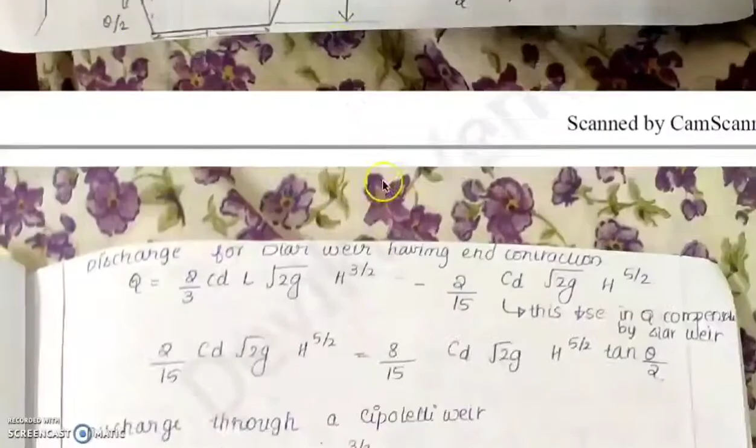So to find out what theta angle I should maintain to compensate the discharge, I can equate the reduction in discharge with the discharge occurring if I give a triangular notch. So this is equated with 8/15 Cd root of 2g H raised to 5/2 tan theta by 2, which you know is the equation for the triangular weir. I am equating these two to find out how much theta angle I should maintain so that it will give full discharge for that rectangular weir.

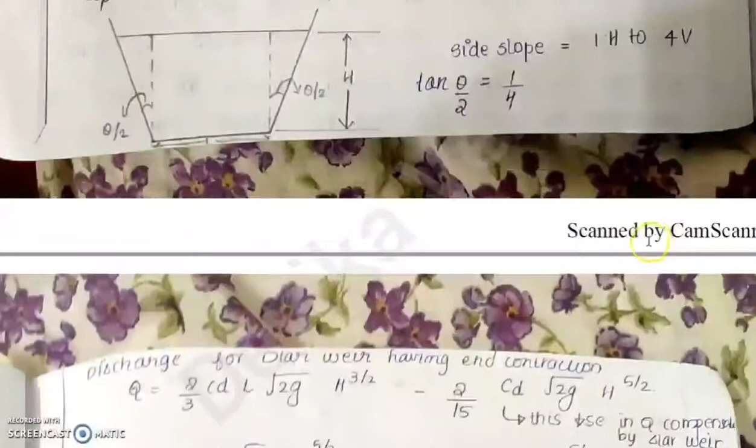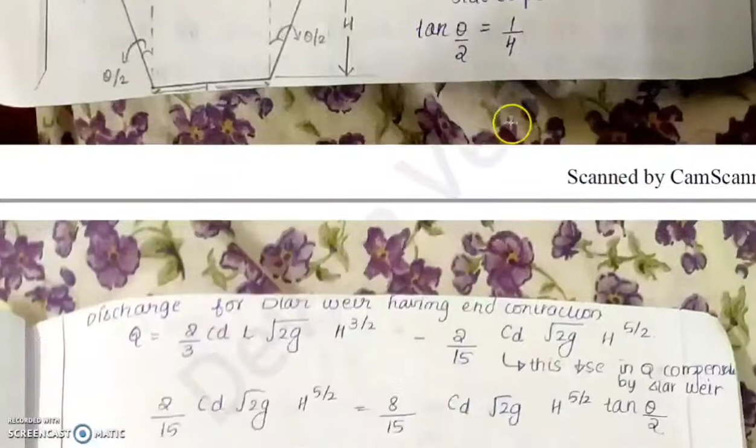So from this, the theta by 2 angle I get is 14 degrees 2 minutes, and the corresponding side slope is 1 horizontal to 4 vertical, that is 1/4. Tan theta by 2 should be maintained as 1/4. Theta by 2 angle is 14 degrees 2 minutes, and the corresponding value is 1 horizontal to 4 vertical.

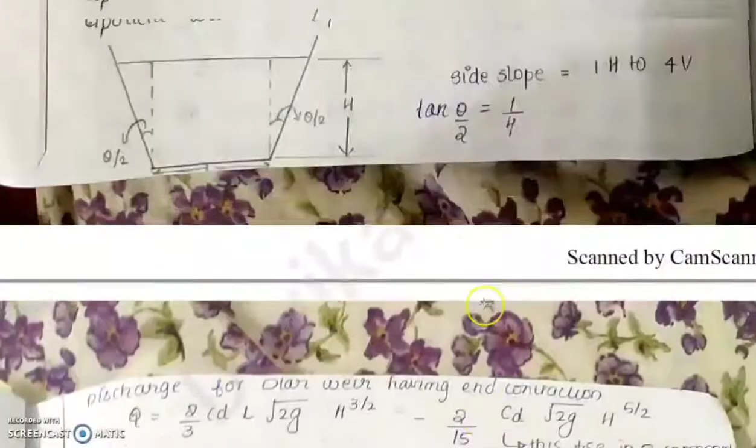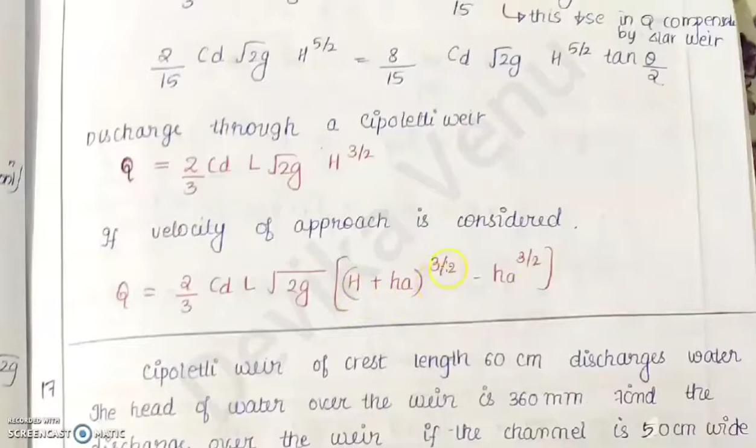So for the Cipolletti weir, you don't have to consider the end contraction term. Directly you can take the equation for the rectangular weir, that is 2/3 Cd L root of 2g H raised to 3/2. If there is a velocity of approach, you have to consider the head of velocity of approach, that is (H plus Ha) raised to 3/2 minus Ha raised to 3/2. I think the concept is clear, and we will see one example.

So, a Cipolletti weir of crest length 60 centimeters, L is given here, discharges water, and the head of water over the weir is 360 millimeters.

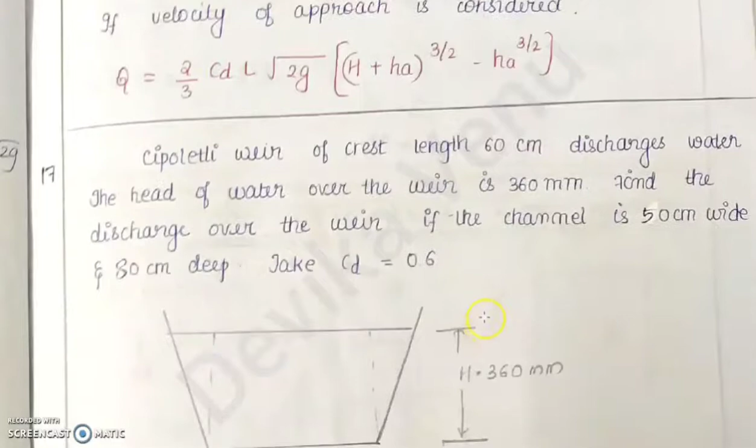Find the discharge over the weir if the channel is 50 centimeter wide and 80 centimeter deep. Take CD as 0.6. So it is given as for Cipolletti weir. You know the equation for Cipolletti weir, and we will see how it is done. Okay, so first I have drawn the figure of the given question.

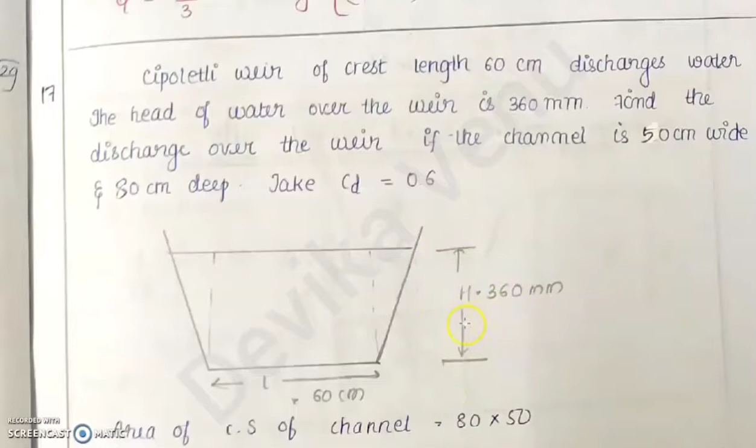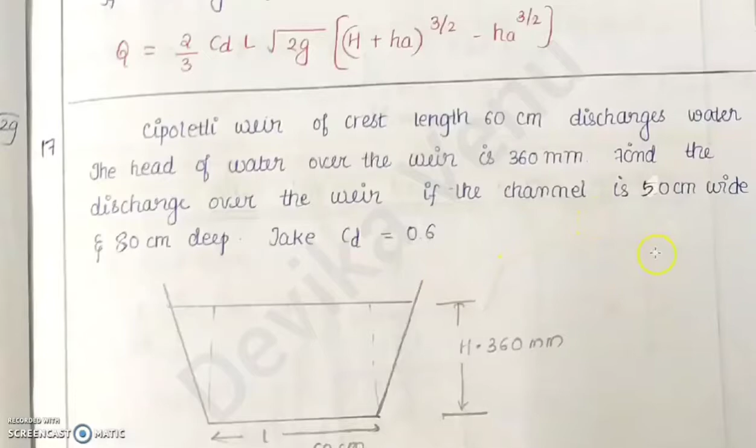So in the Cipolletti weir, crest length is 60 centimeters, height or depth of water in the weir is 360 mm or 0.36 meters. Okay, so I have marked that in the figure. Now area of cross section of the channel. See, the channel is of dimension 50 centimeter by 80 centimeter deep. So since that is a rectangular channel, I can find out the area of the channel: 80 into 50 will give you it in centimeter square.

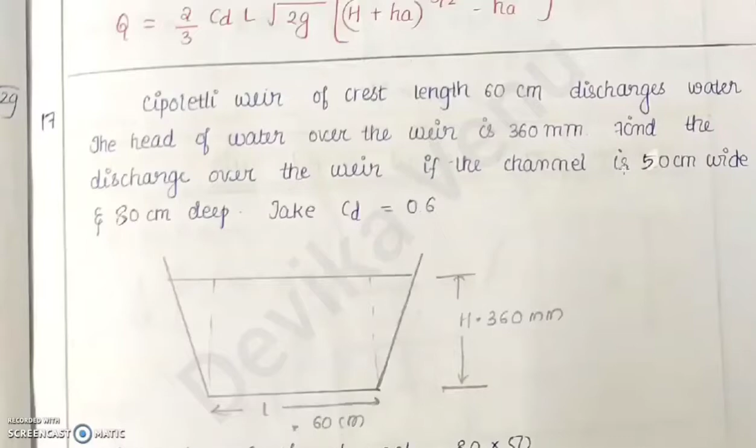You'll get the area. To find the velocity of approach, why it is given is that you have to consider the velocity of approach. How is the velocity of approach found out? That is VA equal to Q by A. The same type of question we have come across before also, how to find out HA and all. You already know now. So to find out the velocity of approach, you got the area now. Now you have to find out the Q without considering the head due to velocity of approach. That is 2 by 3 CD L root of 2g H raised to 3 by 2.

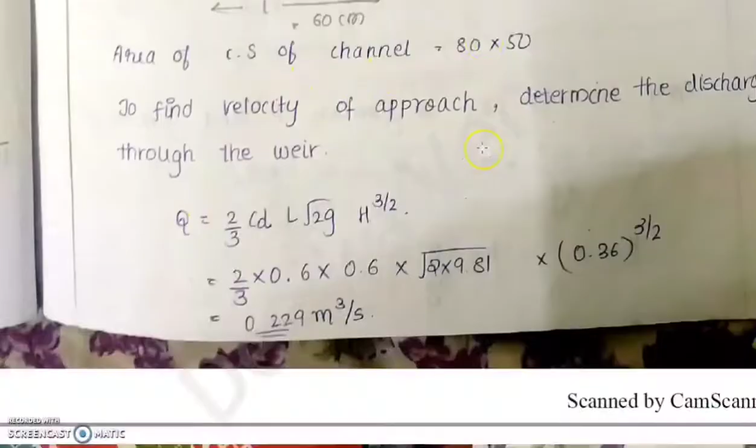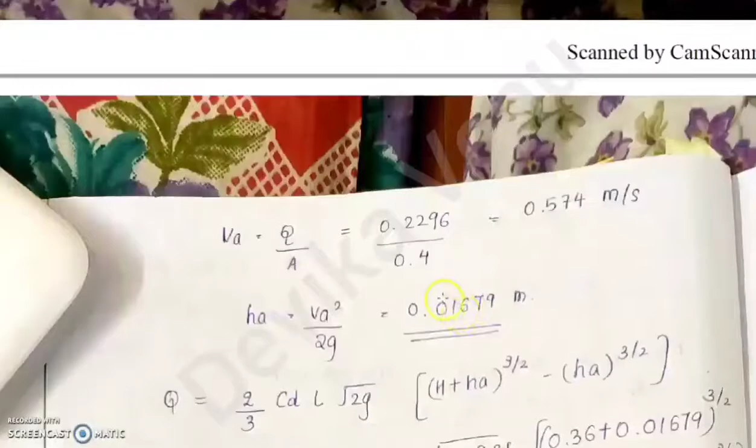All the data are given in the question itself. So you substitute to find out Q. So I have got the Q without considering the head due to velocity of approach, and the area. So Q by area will give you what? Velocity of approach. So once you have got the velocity of approach, you find the head. HA is equal to VA square by 2g. So you will get the answer, this one. Now you substitute that in the equation, this one, with considering the velocity of approach.

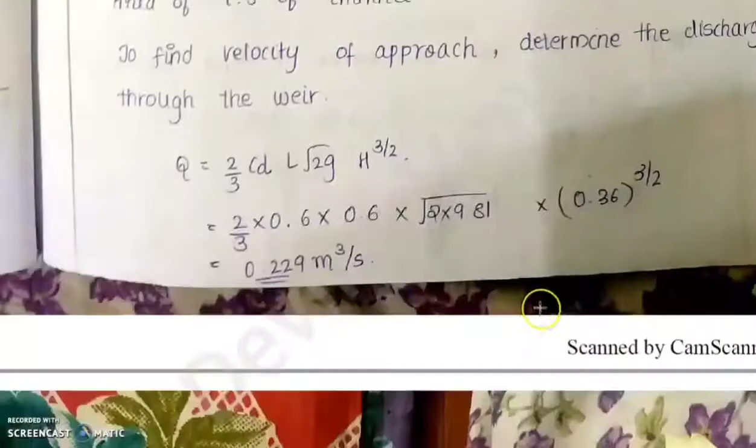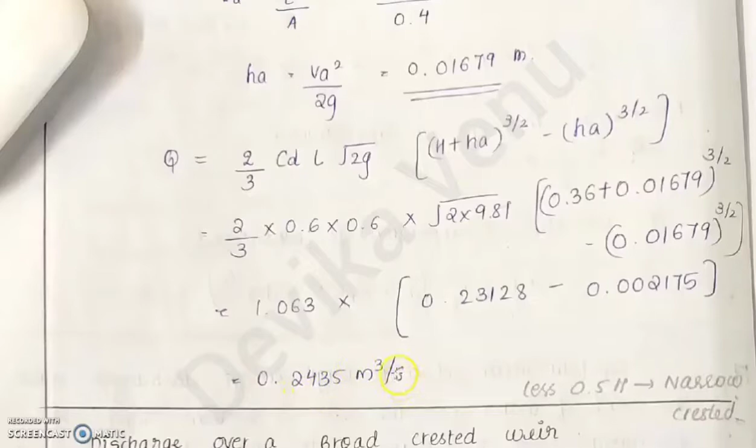This is our equation. See, in the question itself, you are given the dimensions of the channel. So by reading this question itself, you have to understand that you have to consider the velocity of approach and all. Okay, then you are substituting in this equation. This is the equation for the Cipolletti weir with considering the velocity of approach. So all the data we have found out or are given, and you substitute in this, find out the answer as 0.2435 meter cube per second. Okay, I think this concept is clear to you.

Next is discharge over a broad crested weir. Okay, so what is a broad crested weir? It is nothing but a weir with a wide crest. Okay, so the condition is this length. My student has written thickness here. Actually, what she meant was length. See here, this is the length, this particular length. I have taken this as L. So L is greater than 0.5 times capital H.

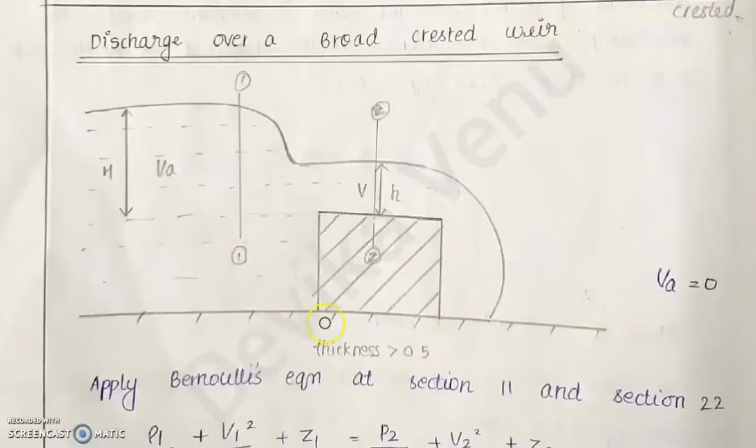Okay, so she has marked some details here. So the thickness she has meant this one only. So this is the thickness she has taken, and this is 0.5 times H. Okay, so when the thickness is greater than 0.5 times the head, that particular weir is known as broad crested weir. Okay, so we have to find out what is the discharge over the broad crested weir. So that is our question.

So in this case, to find out the velocity at this particular portion, we are applying the Bernoulli's equation between these two sections. That is, we are taking the section here where it is a still water surface in the upstream portion, and section 2 is the section with the running water at the end of the weir. Okay, so we are taking sections 1 and 2 like this, and we are equating the total energy at both the sections.

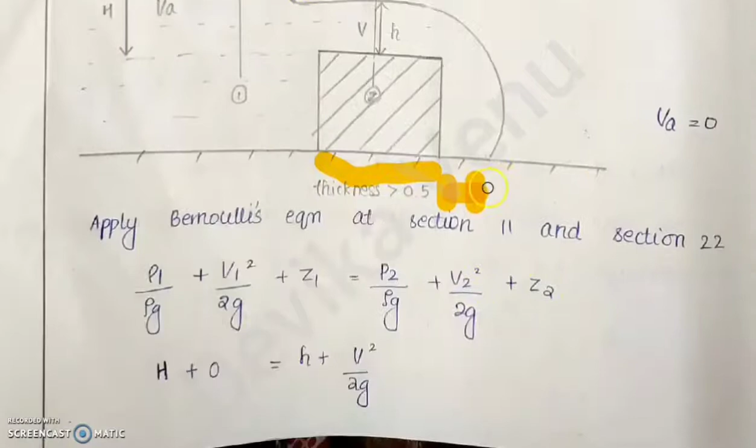Okay, so here applying the Bernoulli's equation, it is P1 by rho g plus V1 square by 2g plus Z1 equal to P2 by rho g plus V2 square by 2g plus Z2. So here at section 1, what all heads are there? So P1 by rho g, since it is at the free surface, will be 0.

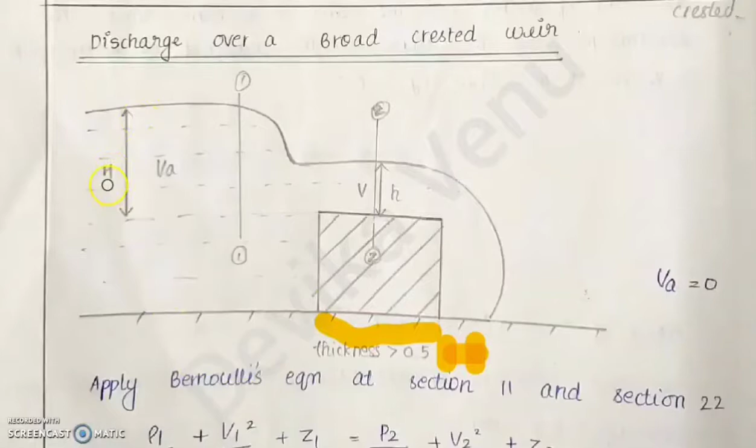And it is a still water area. So V1 square by 2g, again it is 0. And what is Z1? Z1 is capital H, isn't it? So from a reference line, taking the top portion as the reference line, from the reference line to that particular point, what is the head? That is Z1. Datum head is H. So Z1 is H. The remaining two terms are 0.

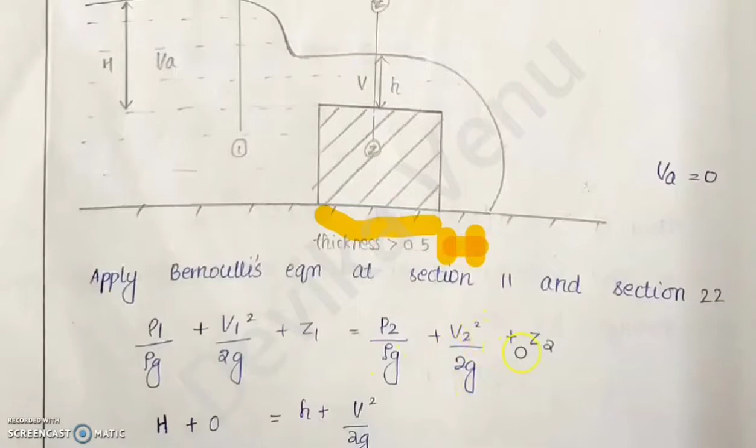And coming to the right hand side, P2 by rho g. What is P2 by rho g? Again, there is no pressure head there. Why? Because all the pressure head is converted to the kinetic head. So pressure head P2 by rho g is 0, plus V2 square by 2g. This is what we have to find out, plus Z2. Z2 is small h. So from the reference line, it is small h. So I have substituted h here, V square by 2g, this is 0. So this is how the equation comes like this.

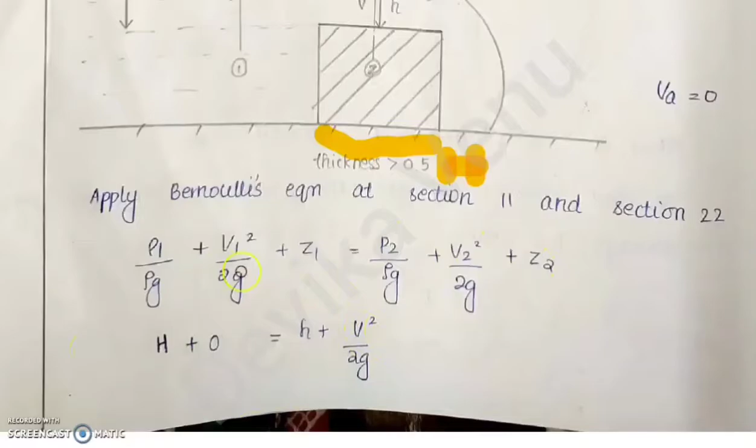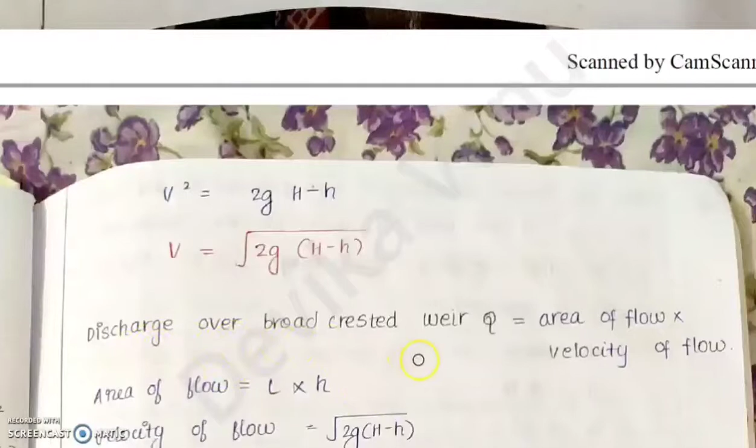So from here, what is V? V square is equal to 2g into capital H minus small h. V is equal to root of 2g into capital H minus small h. So this is the equation for velocity. So from the Bernoulli's equation, we found out what is the velocity. So now the discharge equation is very simple. Discharge is equal to area of flow into velocity of flow.

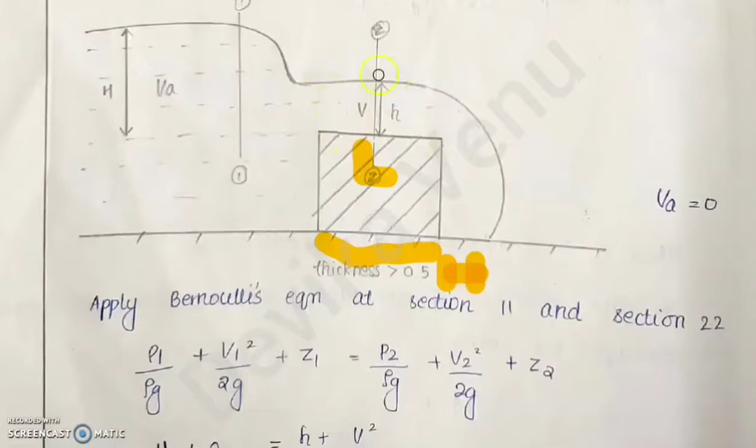So area of flow is what? This is the area of flow, isn't it? Velocity is above the broad crested weir. So the area of flow is this one. So how to find out the area? Suppose this length is L. So L into h will give you the area; this is somewhat like a rectangular portion. So the discharge will be Cd into L into h, that is the area, into the velocity. So we got the discharge equation.

So from this equation, h I am taking inside. So I got Cd L into root of 2g into capital H h square minus h cube. There is a reason why I have taken this small h term inside. So this is the equation for the actual discharge. Now what is the maximum discharge condition? There is an h term, so I have to find out at what particular small h value I am getting a maximum discharge.

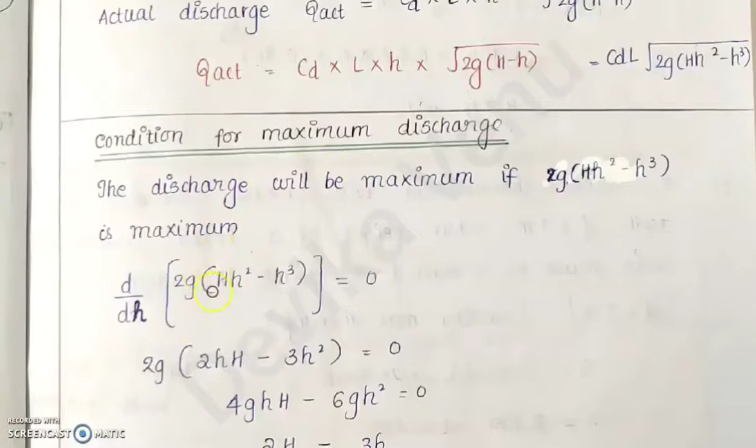So to find out the maximum discharge condition, I am differentiating this term with respect to h. This h term is the variable. So d by dh of this should be equal to 0 if it is a maximum discharge. This is the only term where a variable is involved. So I am differentiating it and equating it to 0, the condition for the maximum discharge. While differentiating, I will get the equation like this. Finally, I will get h is equal to 2 by 3 capital H. So when h is equal to 2 by 3 capital H, I will get the maximum discharge.

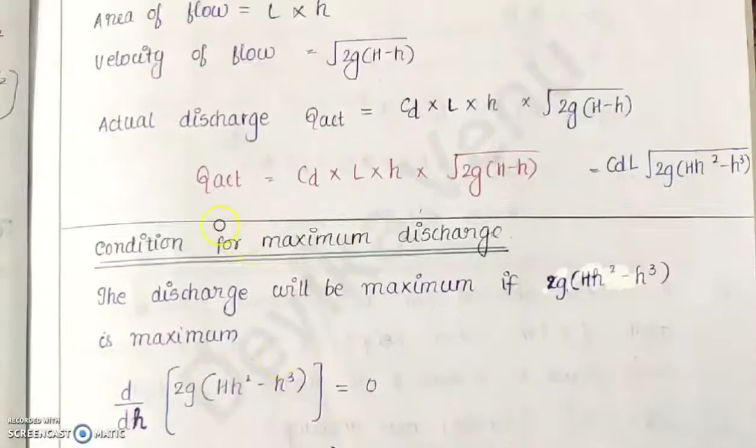So substituting the same value in the equation for Q actual, I will get the value for the maximum discharge. When you substitute 2 by 3 H inside this one and solve, you will get the equation: Q max equal to 1.705 Cd L into H raised to 3 by 2. So this is the equation for the maximum discharge, and this is the equation for the actual discharge, for a broad crested weir.

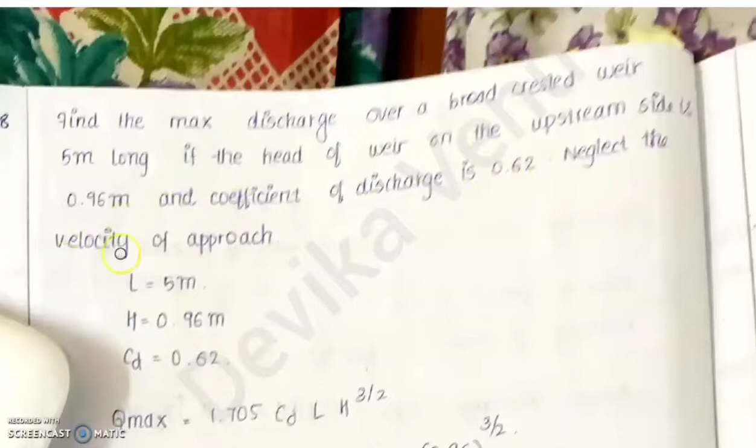And here we'll see one example. Find the maximum discharge over a broad crested weir 5 meter long. L is given. The head of the weir on the upstream side is 0.96 meters, so capital H is 0.96 meters. Cd is given as 0.62. Neglect the velocity of approach. So it is very simple.

Directly substitute in this equation, that is 1.705 CD L into H raised to 3 by 2. So L is given, H is given. Simple substitution, you will get the answer. So if a velocity of approach was involved, what is the difference? Here there will be an Ha term, that is (H plus Ha) raised to 3 by 2 minus Ha raised to 3 by 2. That is the only difference. I hope this concept is clear to you.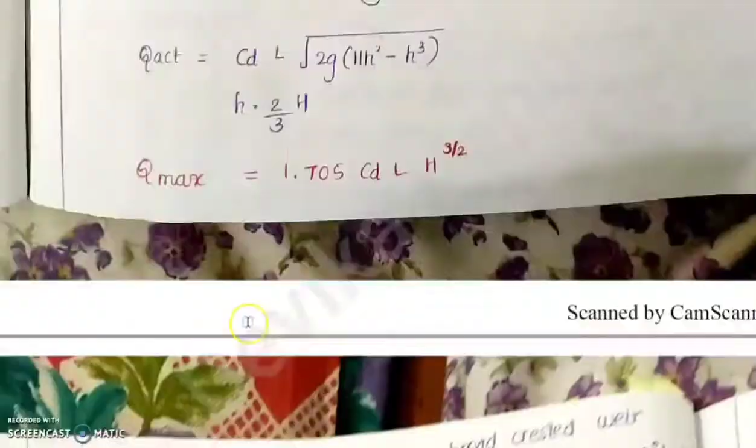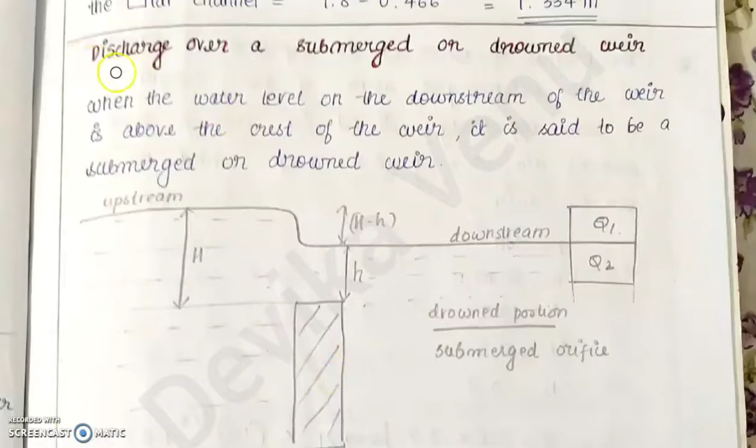And for the narrow crested weir: if there is a term known as broad crested weir, there will also be a term known as narrow crested weir. Narrow crested weir has the same discharge as that of a normal rectangular weir. So now we will see discharge over a submerged or drowned weir. So what is a submerged weir? Here in the figure you can see the whole weir is fully submerged inside the water, both on the upstream and downstream side. So this is known as a submerged weir.

To find the discharge for the submerged weir, first you have to find the discharge Q1 and then Q2, then sum these two. What is Q1? Q1 is the discharge due to the capital H minus small h head, and Q2 is the discharge due to the small h head. For that, you take the discharge of a normal rectangular weir. This seems just like a normal rectangular weir, so here H minus h should be taken as the head and substituted in the equation for a normal rectangular weir.

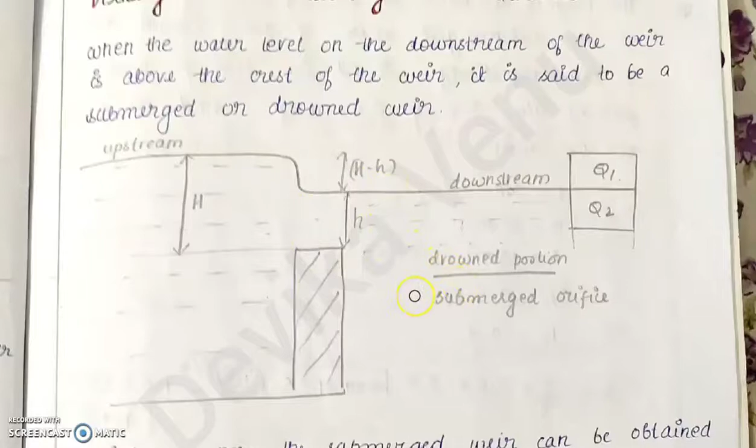And for small h, if you only consider this portion, it is just like a broad crested weir. So you substitute small h in the equation for the broad crested weir. After finding Q1 and Q2, sum both to find the total discharge. So the equation will be Q equals Q1 plus Q2. Q1 is the discharge through the free weir portion, taken the same as that of a rectangular weir with the head as capital H minus small h.

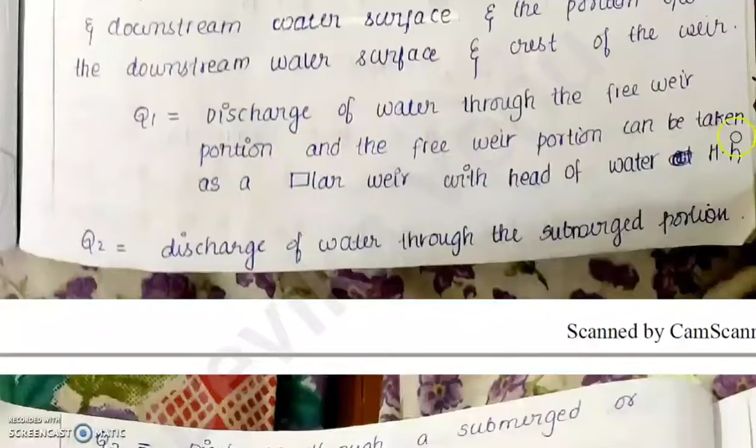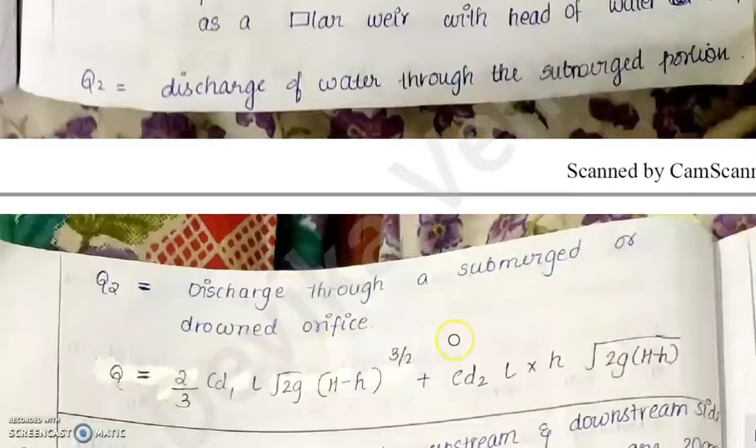Q2 is the discharge of water through the submerged portion. You are taking it as the case of a drowned orifice, and for ease of understanding I told you to take the same equation as the broad crested weir, that is CD2 L into h into root of 2g (capital H minus small h). This is originally the equation for discharge through a drowned orifice. So you are adding the rectangular weir equation for the free weir plus the drowned orifice equation for the submerged portion to find the total discharge through the submerged weir.

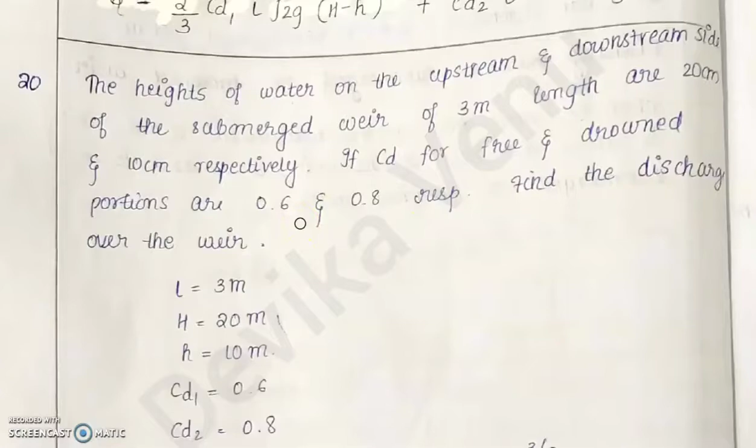So now we will see one example. Here the height of the upstream and downstream side of a submerged weir is given as 20 meters and 10 meters, and 3 meter length. So L is given, capital H and small h are given, and the CD values for free and drowned, CD1 and CD2, are given. Find the discharge. It is a very direct substitution question, so you just have to simply substitute in the equation.

So this is the equation: 2 by 3, CD1 is 0.6, into L, L is 3 meters, into root of 2g into capital H minus h, 20 minus 10, which becomes 10, raised to 3 by 2, plus CD2 given as 0.8, L again 3 meters, h is 10, root of 2g into 20 minus 10. Direct substitution. Finally, you will arrive at the answer: 504.257 meter cube per second. So this is the answer. I hope this concept is clear to you.